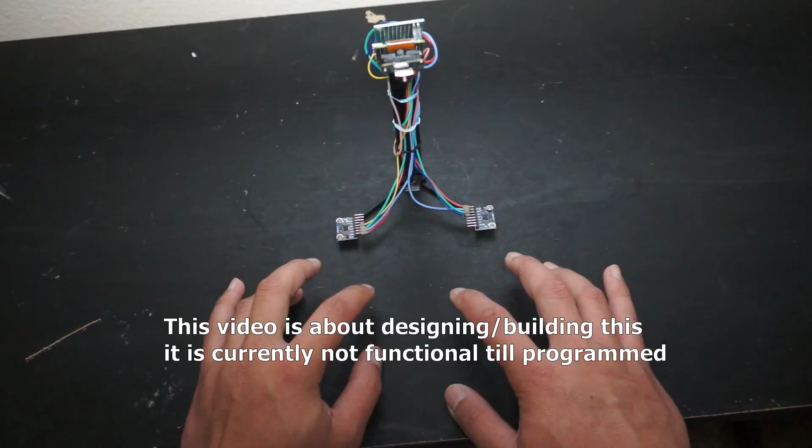So I'm starting a new project. It's a vision slash vibration keyboard. This is something I've always wanted, not in this form though. I want to just be able to put my hands on my legs and start typing like a split QWERTY keyboard.

But a solution for that is hard. There's several ways you can try it, like a glove with flexible resistor things that could maybe work. You could have strings that pull, potentiometers, or you could track every finger with an IMU. Anyway, it just means a lot of wires.

The ideal way is like there's nothing, or something's on your wrist, which Meta has something like that, but I myself don't know how I could get such fine control. This is just a learning project for me.

So I got a drawing here showing how it would work. This camera is more overhead than forward, but you would see your two hands, and then on each side is an accelerometer, which can detect the half that hit the keyboard and then how far away, which that's probably not going to work that well, just because these points are near each other and it'll just assume it's in that vague direction.

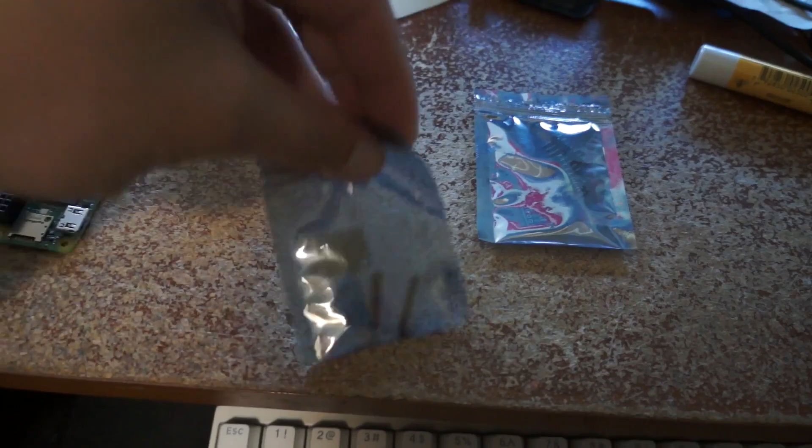These are the accelerometers, the basic 6050. This is an accelerometer and gyro. Pi Zero 2W, which Pi 0.

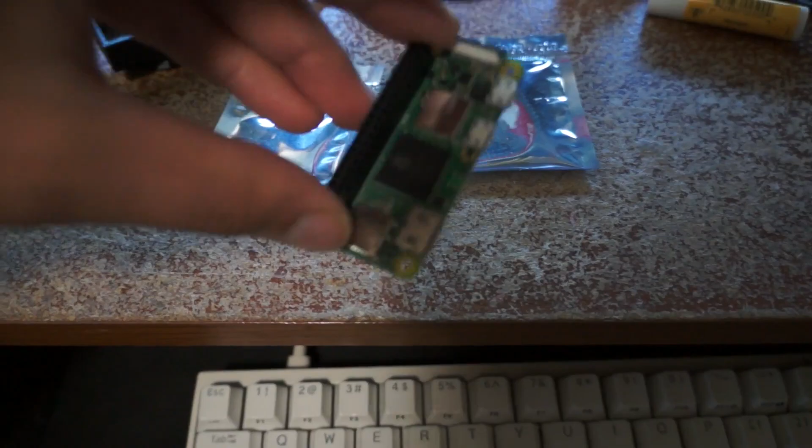This one may have a problem, so I'm flashing the image now. But I remember when I was trying to build this camera here, I couldn't SSH into this thing. The only other Pis I have are 01s and a 4.

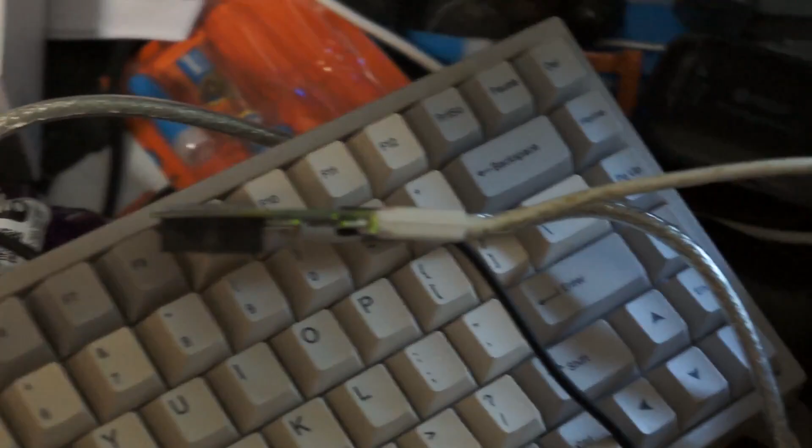So I've tried this 02 out, and there's something wrong with it. It's not working, it just won't work. I tried Bookworm and 11. I bought these online, they were like 15 each, but it's like the fourth one I've bought, so it's possible this one in particular is bad. I go into raspi-config and then try to connect to the network, and something's wrong.

Anyway, what I'll do is use SSH to control it by serial through USB. I think you can do that because this thing will require power from somewhere. I think you could make it battery powered, but there's really no point.

It's just gonna sit on my desk, so it'll just be plugged into a computer, and then you can also program it from there.

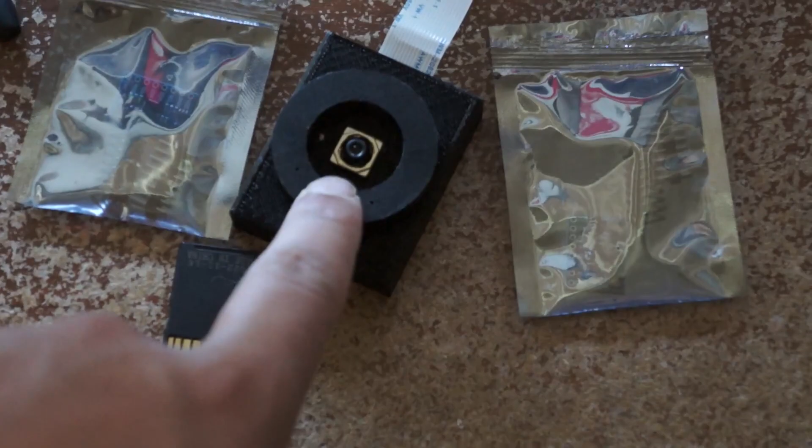But this is the V3 camera module. It's wide angle, so that means it doesn't have to be tall to see both my hands. I already mentioned those are the IMUs.

Progress is slow, and I might be a DoorDasher soon. Just nervous about it because I'm not a people person, and driving my car I'm gonna risk crashing it or whatever. Oh man. But yeah, so I'm distracted.

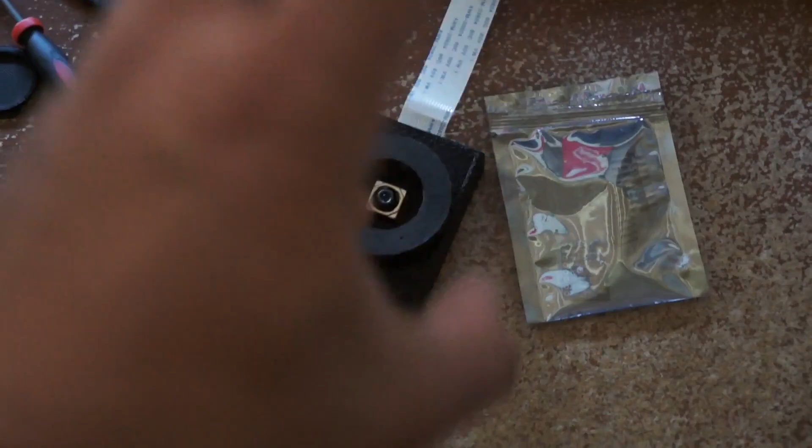I'm trying to get this thing prototyped today, although I only have 5 hours. I gotta design a stand that holds everything, wire it all up, and print it. I'm going for the easiest design where it's bare minimum plastic, so the print time is faster.

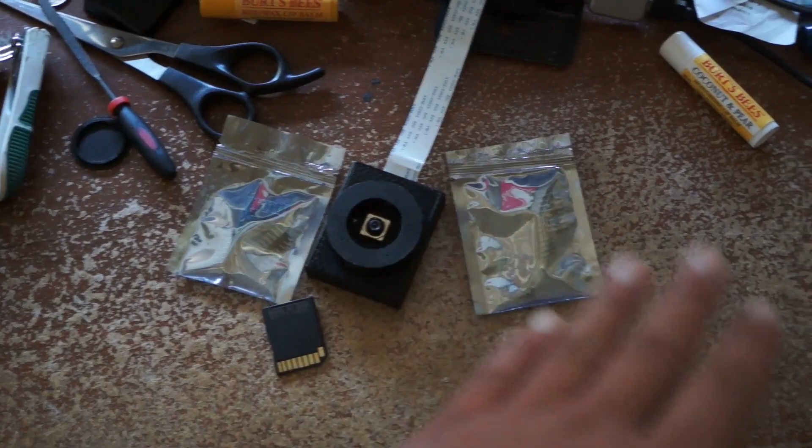I did just realize that this Pi won't be useful if it doesn't have network connection. So I'll steal a USB adapter from another Pi temporarily while I work on this thing, because once it has all its dependencies and whatnot, it doesn't need a network connection anymore. And you can just, well, it still has Bluetooth on it that should work.

Ideally, that's the part that would be keyboard and mouse. Actually, I was thinking about trying to make like a touchpad thing. This is all beyond my skill right now, so I gotta learn some things to make it work.

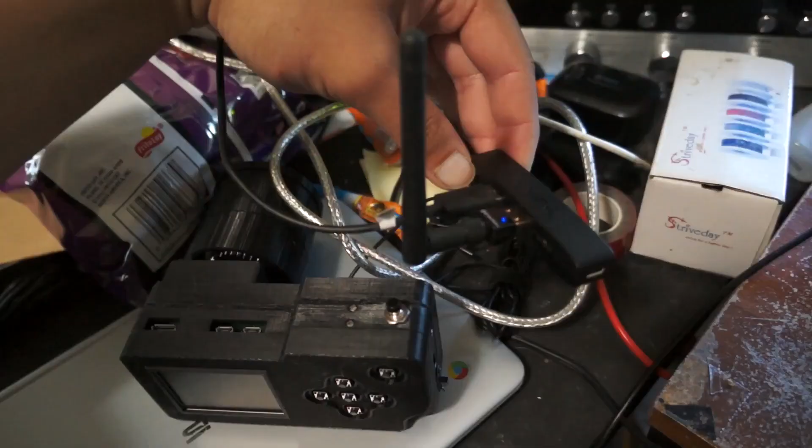But yeah, so here's the USB Wi-Fi adapter. This is an OTG cable going into the Pi Zero 2.

So now there's a WLAN interface, so I can upgrade it and work on it. It can pull down packages. Normally I work on Pis without a monitor, usually headless through SSH, but this one has a Wi-Fi problem, so you can't even ARP scan to find it because it doesn't have an address to SSH to. That's why it's plugged into a monitor.

I'll say too, this whole project is kind of stupid - here's a keyboard, why do you have to make one? It's like I'm filming with a camera, why did I make one? That's even worse. I don't know, it's just the process of figuring something out, imagining, making. That part is fun to me. I think about that with other things, like why make more operating systems, why make RISC-V - which is open source, cheaper, that kind of thing.

From my point of view as a higher level language developer, like Python or JavaScript, the thing running underneath doesn't matter to me. But yeah, I don't know, everybody has their reason, their drive, right? Like I don't think a fancy wooden lamp should cost $3 grand, but some people would buy it for that. That's a real excerpt from a friend of mine that deals with antiques - someone bought a wooden desk lamp thing for $3 grand. I was like, damn, money is funny.

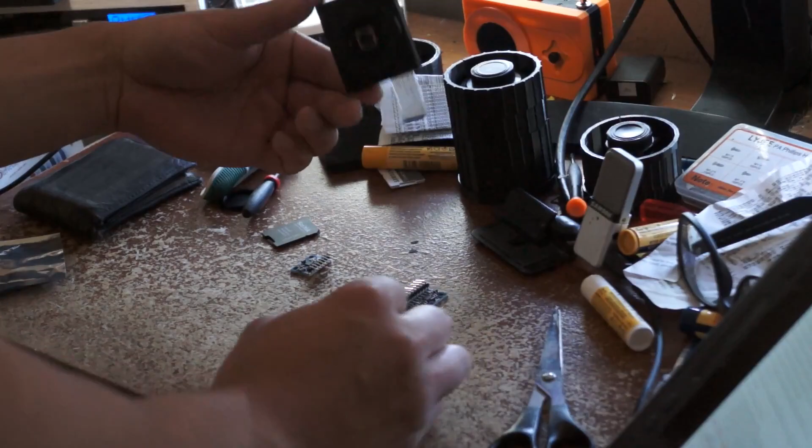Here's the camera, your hands are on here. See, my keyboard is down here. And then the thing that's hard is this table is brown, my skin is brown, so I don't really know how well this masking is going to work.

Masking, where you remove a certain color or range of colors from the scene. So the camera will be above, and what I want to do is just naturally rest my fingers, which is not the same as a straight keyboard - my hands are outwards like that. And then, on the monitor, you'd have a live video feed of your hands, and the bottom's like a green screen, and you have the keys of a custom keyboard.

That's the thing too, like if I'm writing code I need to be able to see the symbols. This 65% keyboard has bracket, square bracket, arrows, slash - those are the most common programming symbols you need, so I'll have to have those.

I think it's interesting though, these keyboards are designed straight - I know there's other ones that are split or curved or whatever, but yeah. I tried to make a keyboard before for a touchscreen and it was so annoying, arranging the individual keys. The easiest way for me to do it is through HTML and CSS, not through a native graphical library like GTK or whatever. But yeah, so that's the plan.

And then I feel like it makes sense, right? Because the camera can't easily tell that your finger touched the surface, but the vibration detection from the IMUs would do that. Isolating it by hand would also make things easier than just using one. I'm gonna try and do a better job of documenting the process, what I'm doing.

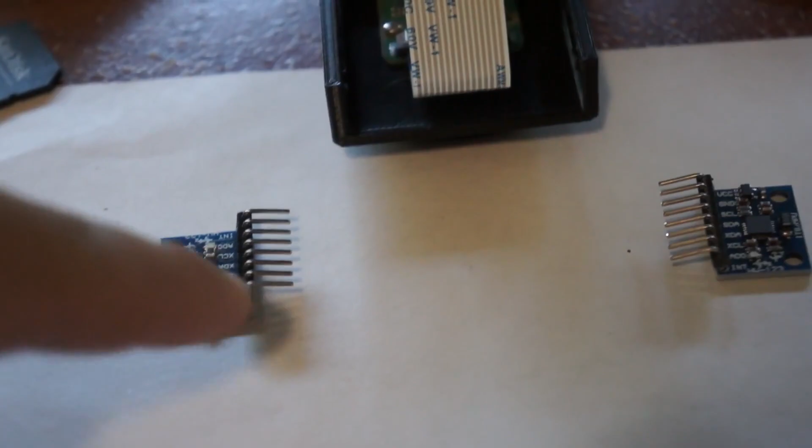So after that, I gotta solder these down. Just put some flux, solder, connect the camera to the Pi, which that can come later. But what I have to figure out is how high up off the ground it needs to be to see my hands.

And then I can design and model this. Well, I already have models of those parts, but knowing that distance and the X distance, that's how you start modeling a physical body.

The Pi Zero 2 here will have a board, not really a daughter board, but a PCB board with a male 40-pin header on it. That will be where it powers the IMUs from the 5-volt here, and it'll also take in all the SDA SCL lines for the I2C.

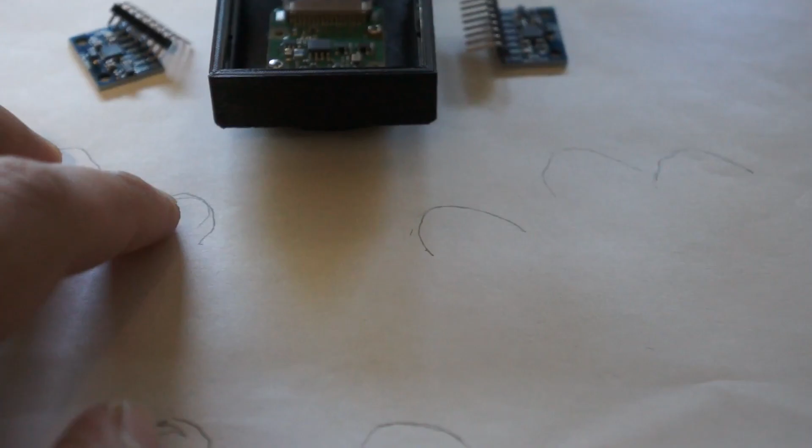After that, I gotta start programming some things, like getting these values, which I've already done before - not really hard, a lot of libraries for it. What's hard is the vision masking stuff, specifically doing it in real time, fast enough for keyboard use, and then merging the IMU data, which is where the ML training comes in. Right now I don't know how to do that. I have some idea, like I've watched people train models for handwriting, but yeah, I'm gonna get to making this.

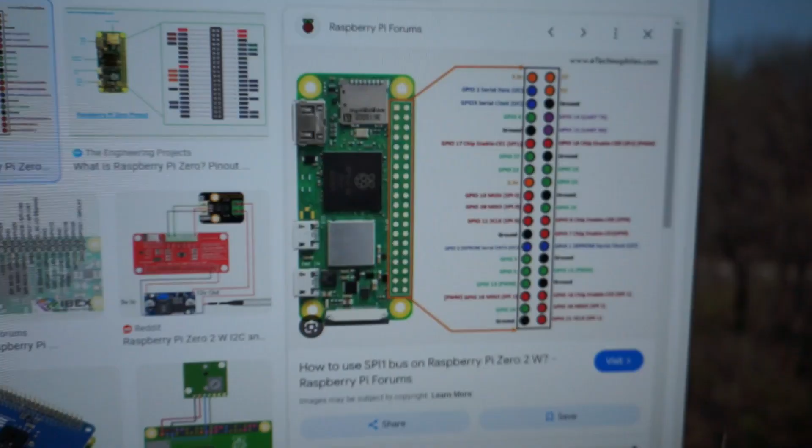Just a quick comment - this is the pinout for the Pi Zero 2. The other Pis are similar too, if not the same, but I'm not saying that. There's the I2C there, that's one, and there's another one here. Each one can have multiple devices attached to it - they'll just show up as different addresses when you scan them.

That's serial right there, UART. And the MISO, MOSI - that's SPI. So yeah.

I was actually thinking about it. I think ideally the design is like a stack. The Pi attaches to the camera, and then this thing is mounted to a swivel, which you can tighten with a screw once you've aligned it.

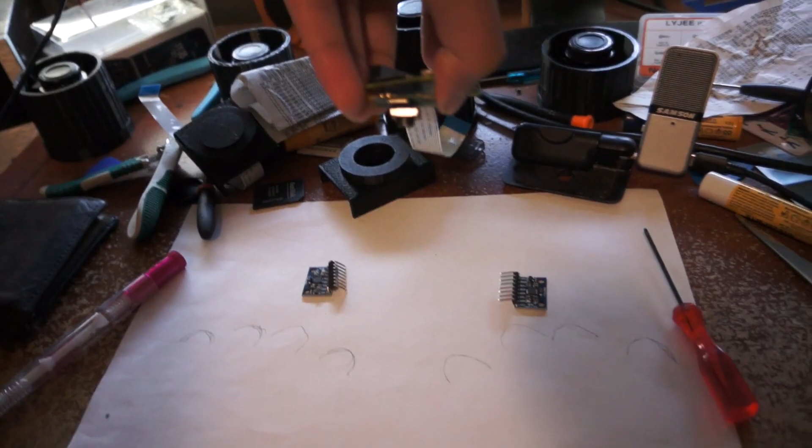And that just goes above - see my fingertips there? I'm not trying to have it directly over. I want it to be like at an angle.

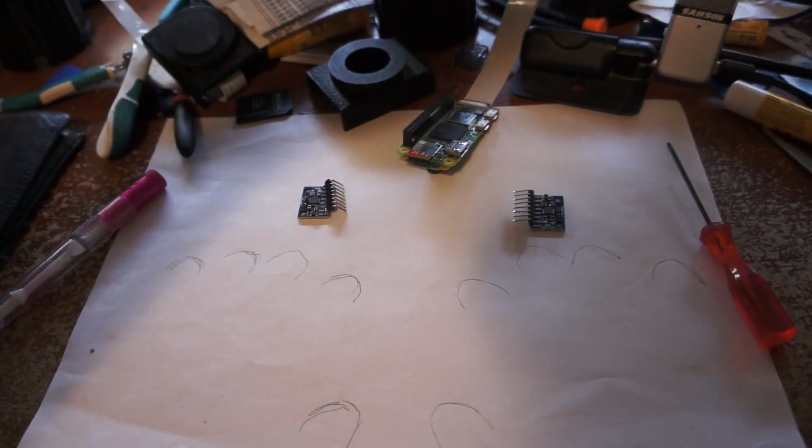And then the legs of the stand hold the IMUs, plural. And then the USB connected to this thing - well, it's really just power, because ideally this thing works as a Bluetooth device. I've had problems with that, so I don't know. But for it to be useful, it has to be low latency, like a lot of my keyboards are 2.4 gigahertz or Bluetooth, so that's what I'm going for. I mean, direct wire would be something, but I'd have to learn how to make it appear as a PS2 device or whatever for a keyboard.

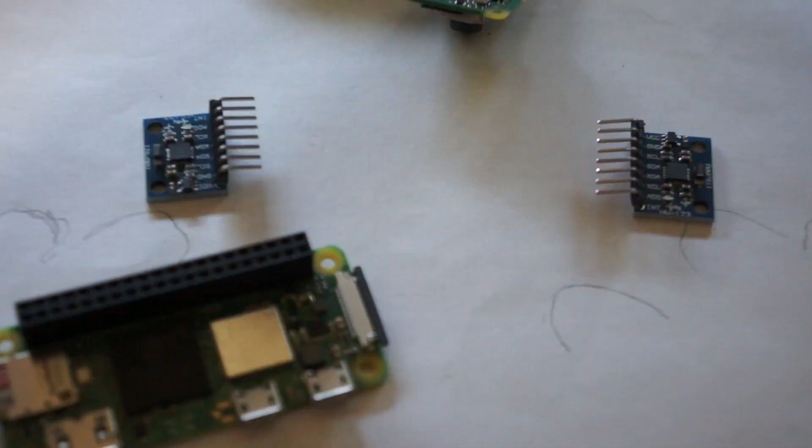So I don't know. I want to point out, you only need 4 wires for the IMU - the power, VCC, the ground, SCL and SDA, like clock and data. And you can see here, it just goes in there. In the library, you specify the address for each one, and then you got your loops running. Then you're like, a tap on this side picks up the Z value, acceleration pulse - so it'd be like, oh, left was tapped, right was tapped.

This is like the laziest design I can think of. There's one flat piece, it's like an A shape, with a couple holes for screws to go into it to mount the IMUs. They are almost flat except for where the male headers stick out underneath, so you have a groove, and then holes thick enough for screws to go into without affecting the flat base. So it'll probably be like a riser platform, with screw surrounding material around the hole for the threads.

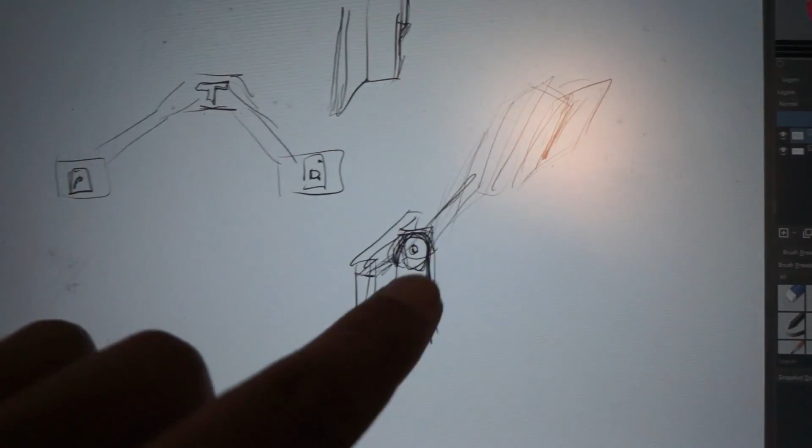And then there's a T-shape insert thing. You pressure insert this, it's not like adhesive or anything. It's like a long extruded T-rod, and it has this round head where a female thing goes around it - screw. I think that would work.

If not, you pinch it. But anyway, this is like a pivot point. A screw would be ideal, you just tighten it. It probably will have outer clamps that get pinched together to grip it. That's like a standard hinge design. And this has the Pi on it and the camera, so that's the thing you swivel to aim down at your hands.

So that should be really simple to make. Installing Pi Camera 2 right now. I'm just running the MJPEG server with Pi Camera 2, so that will allow me to live stream what this wide angle camera is seeing, and then I'll raise it up until it has a good view of the hands.

That'll be a good base height to work with for the physical design of the body. Then I will finally get to soldering. Solder that, make the board, attach it, and it'll be design and printing. Probably won't finish it before I have to leave, but I'll finish it today. Then I'll put this project aside for a bit and deal with door dashing.

Well, I was trying to measure this distance, but this cat is in the way. Look at him, he just woke up. Look at that.

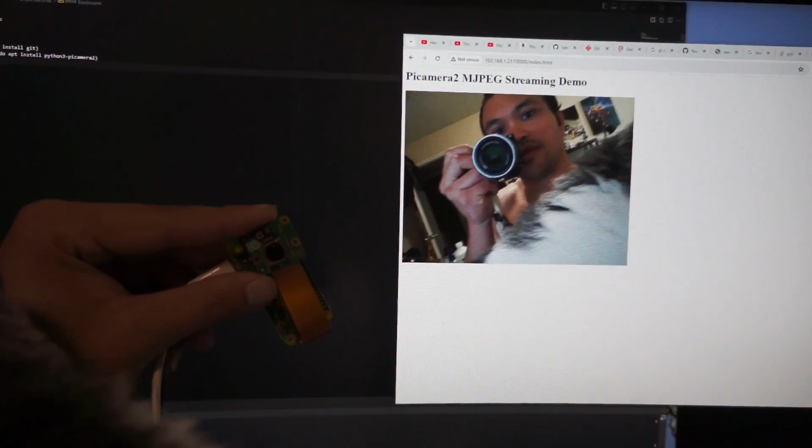The live stream is extremely slow. I think it's because of the USB Wi-Fi.

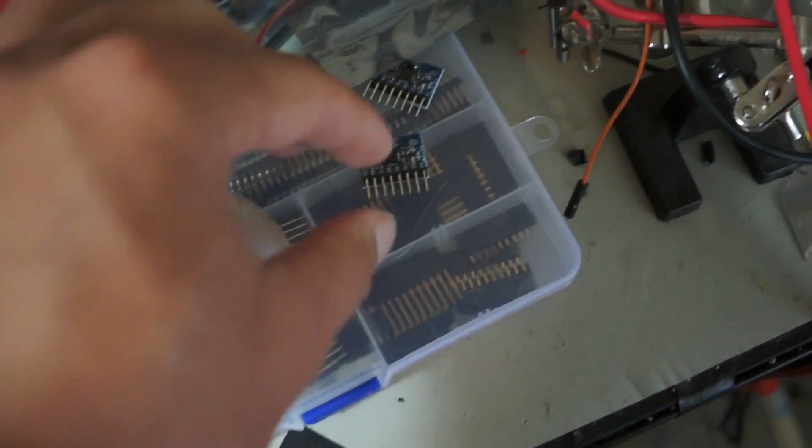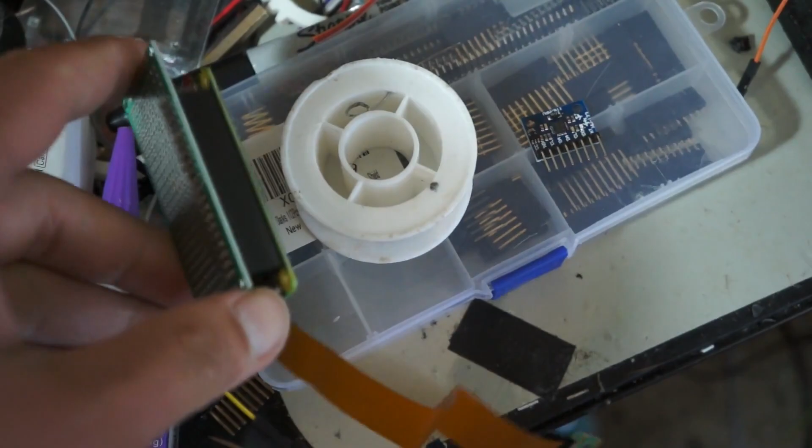So I got the board soldered on there. I also soldered these on. I'm trying to find a wire right now, I need a piece like this long. I've got 6 out of 8. Trying to find black or brown, something for ground. Then I'll wire the IMUs up to this and test that they work. After that I'll be able to start designing the stand and print that.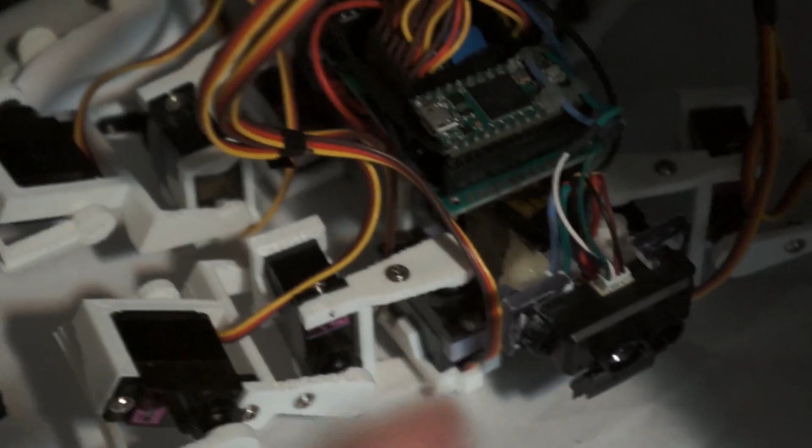I want to point out that I've made a lot of mistakes in this hobby. There's like a bunch of burnt Pi Zeros. There's my freaking robot that I hide from my cat so he doesn't eat it. Feels so bad that it's hidden in there. That's fine, it works and everything, I just hide it so he doesn't chew on it.

So it's like the worst solder job. Not really terrible, it works, but anytime you've got to join 2 wires to the same point, that's problematic. It's better to just extend it and separately solder them. But I did it anyway.

Oh god, I had to sneeze. Alright, so God, yeah, I'm struggling today, man. I'm like, I don't want to do this. But yeah, I have individual shrink tube, but I'm just gonna use hot glue. Feeling lazy.

So you can see here, I'm looking at a pinout over here. So 2 5-volts, a ground, and the data and clock lines. Go over here, see the cable for the camera? It's the same over there, the cable for the camera. Orientation's right.

So then, yeah. Positive 5. That's ground. Across is 3 volts, nothing connected to it. 3.3, that's your data line. And then clock is green. These are just ground. So yeah, I'm gonna put some hot glue on those. Well, those are fine, those are clean connections. And then I'll write some code and test each one to make sure they both show up.

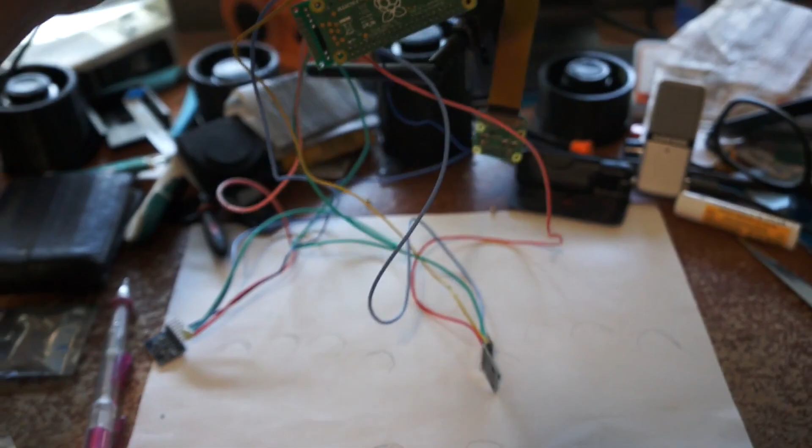I wanted to be sure the wires were long enough, but this is a bit excessive. Because the Pi will be up there somewhere, and the IMUs are only going to be that far away. Oh well, alright, let's see if I can solder.

I'm looking at this Adafruit tutorial and... why? I don't want to do that. I want to look at the command. What's the command? There's just a freaking single CLI call. Where is it?

Oh yeah, alright, so let's do raspi-config. Go up here, looking at interface. We want I2C, yes. Okay, finish. And then where is it? Is that it? ls /dev.

There's this thing where you scan the bus. That's it. Sudo. I2C. I2C detect.

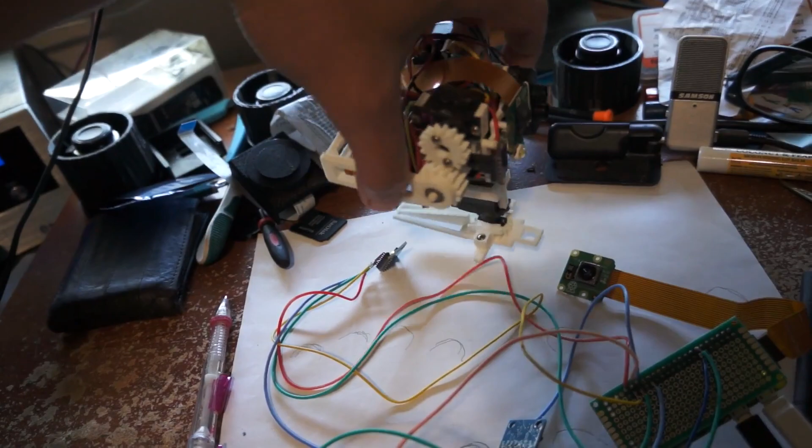This is interesting, it says it only has two buses but you can have three. I don't know what's up with that, but there's one that has 68, there's two 68, so they're both showing up. I just gotta figure out which one is which.

And then I'm doing left and right for the orientation from the human POV. I don't know if that's dumb or confusing, but it makes sense to me. I should be able to tap, tap, tap, like left. Actually, right will probably pick it up too, but I'll just do a comparison of which one is stronger.

So left, up, down, down, down. Like you can see it. Holding it still, right, 1. Turn perpendicular, 0. Yeah, because the force is orthogonal, or no longer parallel, it's orthogonal.

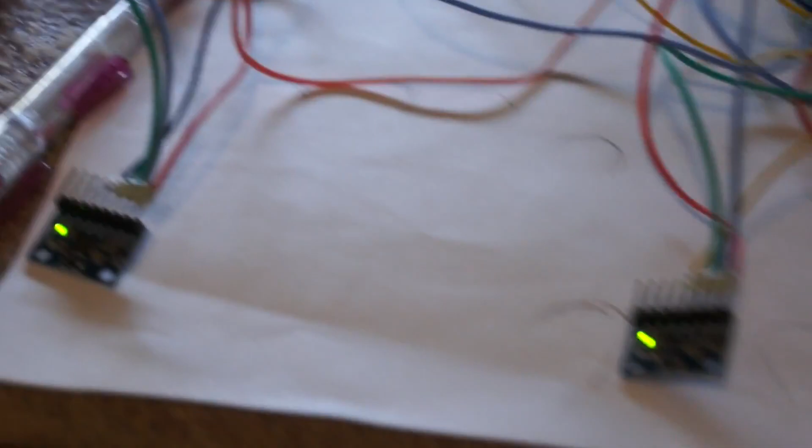Anyway, so that's working. God, these wires, they trigger me, man. They're so long and they're just tangled. Ah! But I'm lazy, so got that.

Now I just gotta design the body, assemble it, blah blah blah. The camera does work, but the USB adapter Wi-Fi stream is too slow.

I'm also concerned this thing takes really big pictures, like 4,000 by 3,000, almost 4 by 4, but and they're super wide. When you're doing the real-time masking, it's not gonna be that big. So the issue is how far away should it be from my fingers? But that's not really a problem because you can just print longer or shorter T-beams and raise it up and down. So that's not hard to change, at least.

So I'm slowly working on the design. These are all the main parts modeled. Main concerns are the dimensions, like length, width, height, volumetrically, and then the holes for those screws for mounting it. But I decided that the base where the IMUs are would be 2.5 inches apart. That's just based on this.

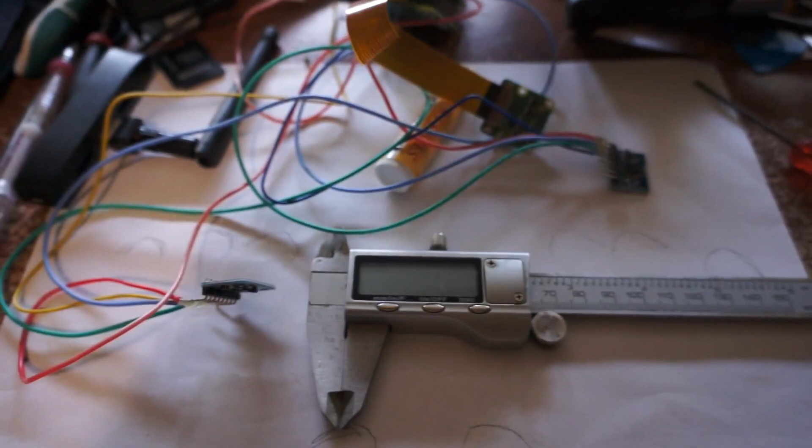It's actually pretty big, but yeah.

So you see these two points here, your hand is here, middle of the IMUs, middle of your hand kind of. And then the angle, I don't know, I didn't want it to be 45 degrees so it's a little less than that. It's really not scientific at all, I'm just making this. But it'll be like a physical platform, and then most of it is code.

Man, this is like the laziest thing I've ever designed. I'm just fighting like, I don't know, sadness.

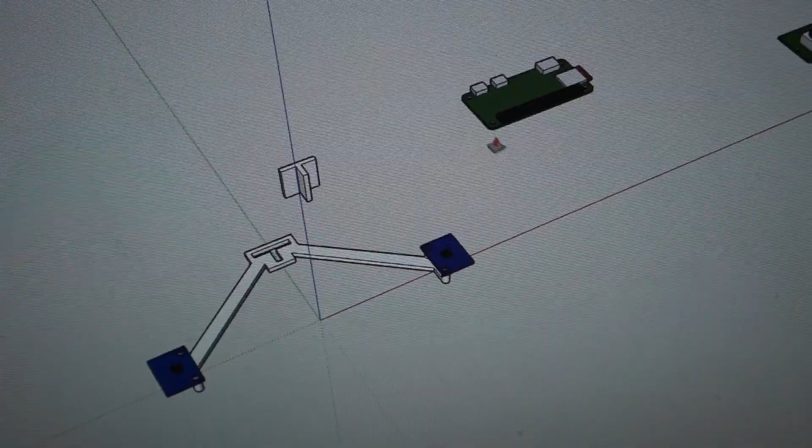I'm concerned that this thing is not gonna work, because it's relying on vibration, right? But the IMUs are away from the floor. Granted it's a solid piece, so the vibrations will travel up to the IMU anyway.

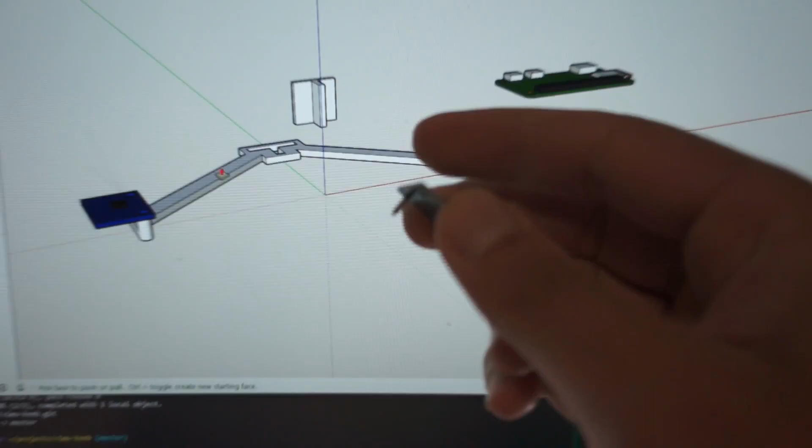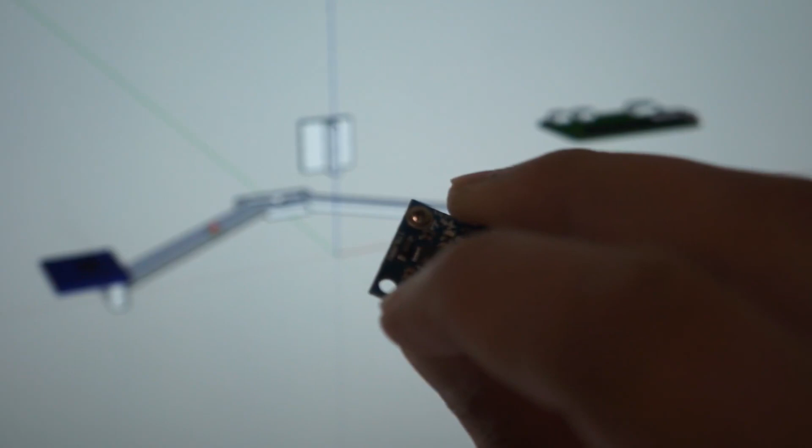But I'm using these, where is it? Where'd it go? Oh yeah, right here. Well, you can see it on the actual IMU. These are like cheap servo screws, very long, but the main thing is the head is wide. See there? It's larger than the hole on the board, so that's what pushes it down, or grabs it.

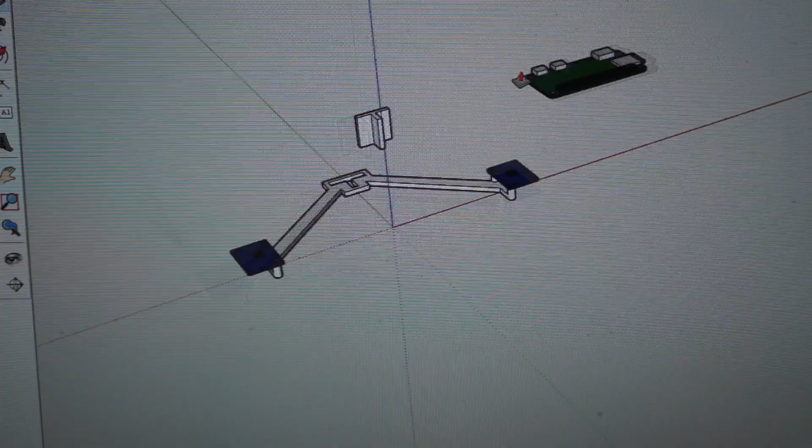Yeah, that's an easy thing to print. Attach those, then you have an extruded T-beam thing with a hole at the top. I've gotta design a mount for the Pi that also holds the camera, which gets attached on there.

The USB stuff attached to the Pi will suck, that'll weigh it down. So the hinge might have to be really tough to hold that weight. But eventually, other than the USB thing, it should operate off Bluetooth, which is another thing I gotta deal with.

I've got like another hour, 15 minutes before I have to leave.

I could print this real quick. Look at that light.

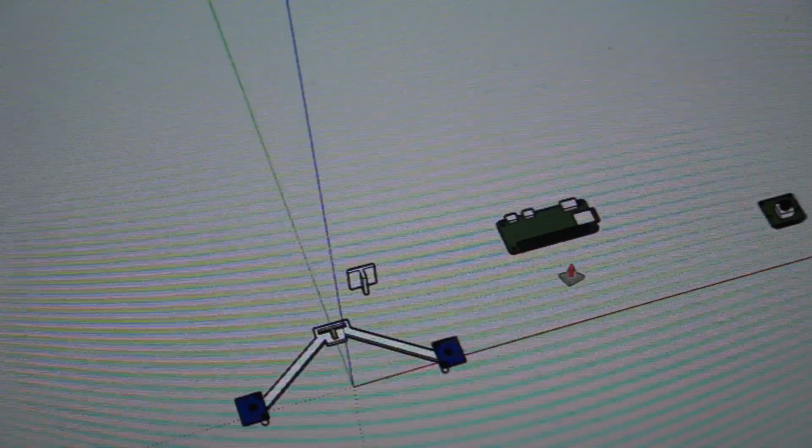The thing I want to say is, a fast way to prototype this without figuring out Bluetooth is to use WebSockets. You can make a web interface that receives the data via WebSocket and then display the letter typed. I mean, before all that you can just do it in terminal, but I was talking about seeing it on screen.

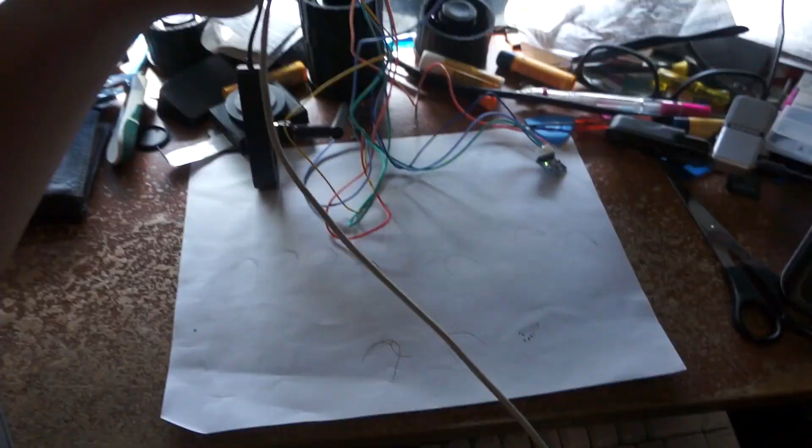This is a quick sample photo. And man, it has to be high up, like that high, to get a good shot of the hands. And this is a wide angle lens too, so yeah.

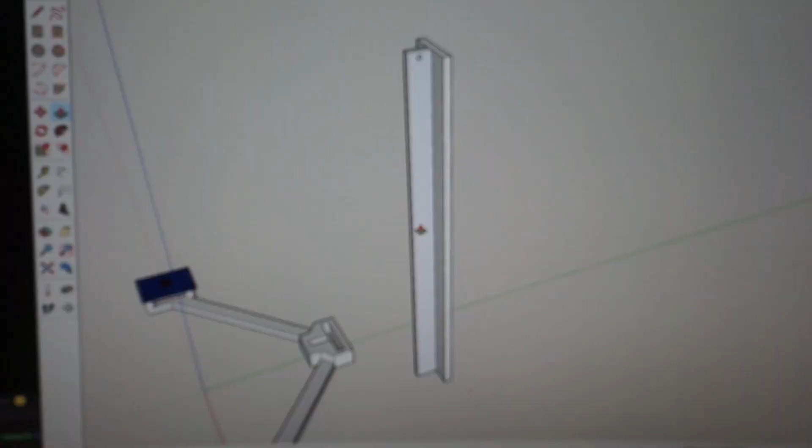Damn, that's taller than I thought. So I'll get a measurement of that, and that's how tall the base plus the angled mount has to be, at least. So just thinking about this, initially I was going to make this angle changeable. I also thickened this because I already know that's too thin. But...

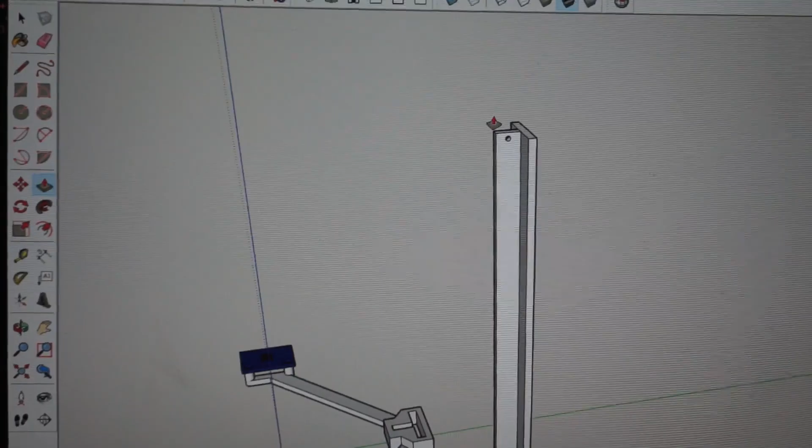If it really is like machine learning and everything, it's going to be trained at a specific angle. So this should not be something you can just change. I mean, people's hands will be different, so I don't know. I mean, if you train it yourself, you could change the angle.

I don't know, I'm gonna see. It's not hard to make it dynamic, I'm just wondering does it make sense? Because you could design the angle of the swivel thing to be fixed. So imagine a piece coming in like that, and it has this cut, so it matches this perfectly, and it also rests on this ledge.

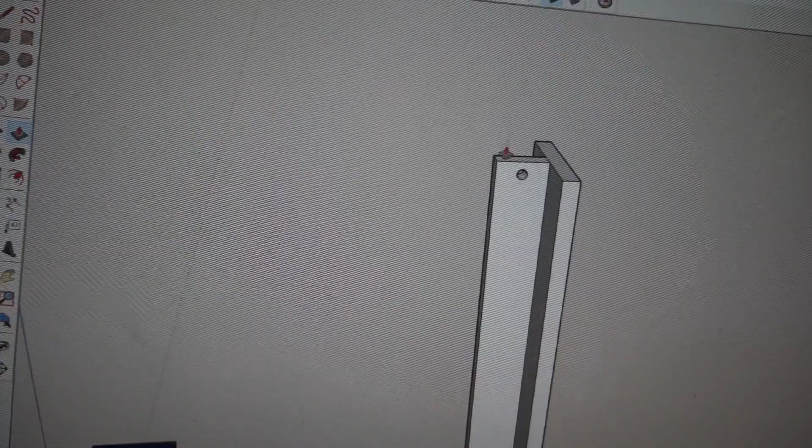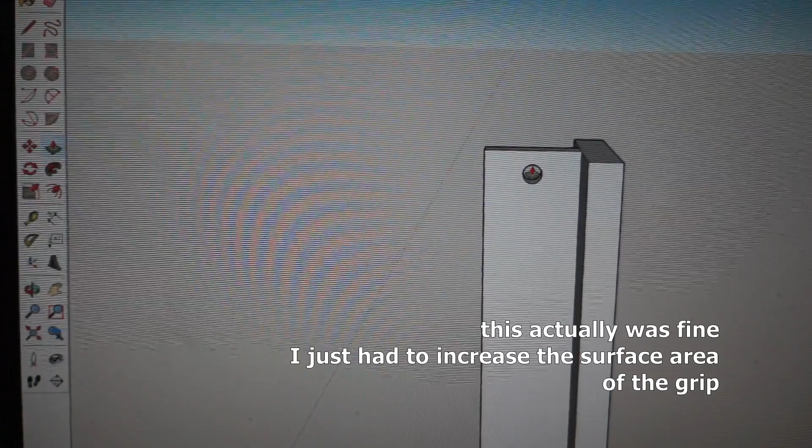What I'm concerned about with making it swiveling too is that the weight of the Pi and the camera is going to be a lot, and your squeezing part will have to hold all that load, which I've designed before, but yeah, I'm just lazy right now. I don't want to deal with it.

So I'll pick an angle, because honestly the physical part is minor compared to the code. The code is going to be where everything is, that's going to be hard.

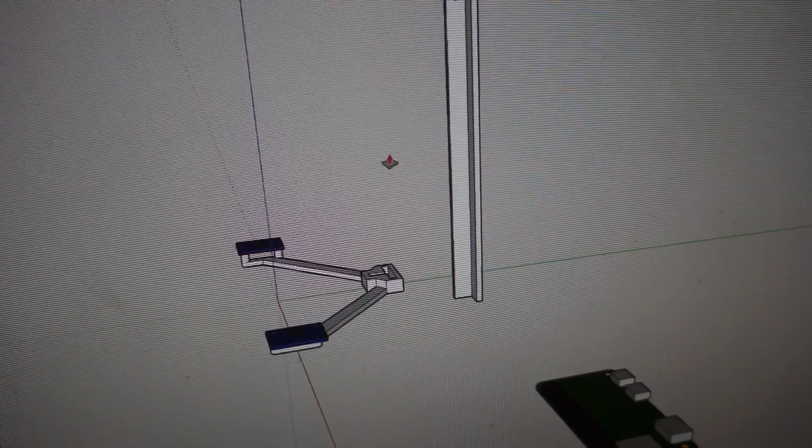There it is. There's the first test fit.

Modified the design with a raised ridge here so it's even stronger. This part has to be thicker too. The screw part is fine. I'll probably thread it first, like run it through without the IMU before mounting.

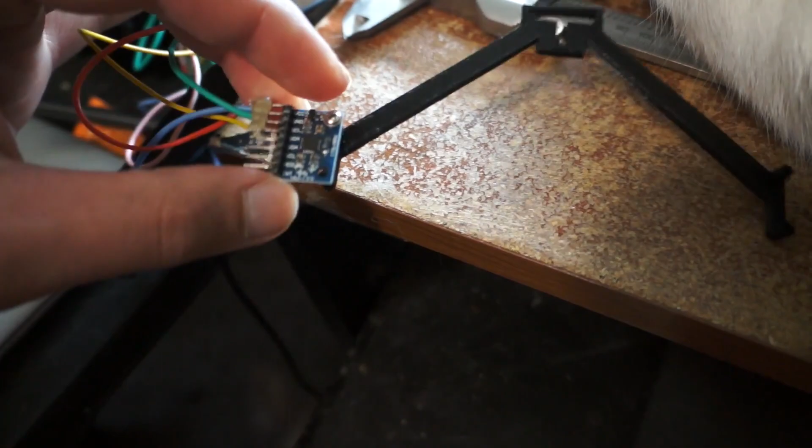Yeah, it sits like that.

I should have had the wires on the inside rather than outside, makes the profile smaller. I still can, it just moves the IMU closer inwards. I will though, it's cleaner to do it that way.

I forgot I had some more of this pad stuff, like for your mouse or keyboard rather. So, and that's black, so that's easy to subtract from your hand, it's just 0, 0, 0.

So yeah, the only thing is it's a little long, I'm gonna have to cut it this way. It hurts, but yeah, the thing is this softer material might be nicer to type on.

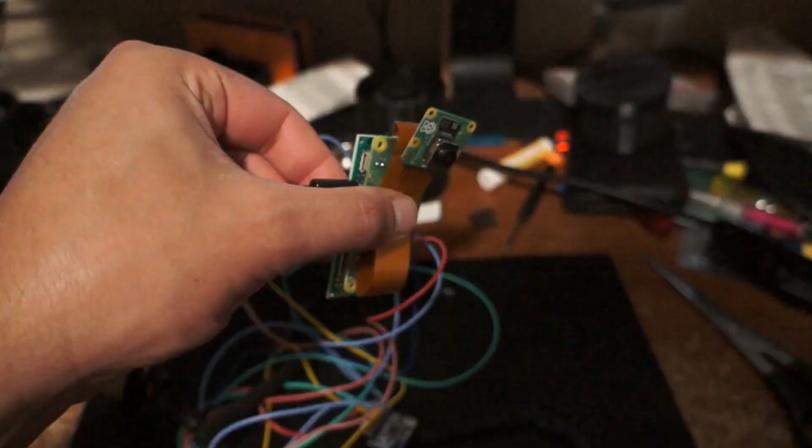Trying to come up with a lazy design for this. Yeah, probably screws coming from the back, pulls it. No, that won't work. Well, I'll detach this piece.

Detach that piece, screw from the back forward into the plastic. Let's see. This camera has to be mounted to something too. Like that. Trying to figure it out.

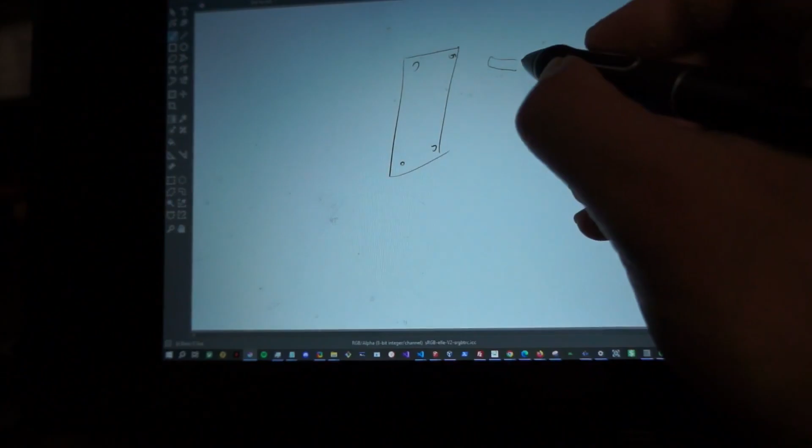So it's a rectangle like that. Holes - let's say we've got these screw cylinders for it to go into. Assume they're connected, 4 of them.

Then, well, if that's solid, we can have the screw clevis thing, or whatever you call these things, that connects to the T shape with the hole. You put the screw in like that. But...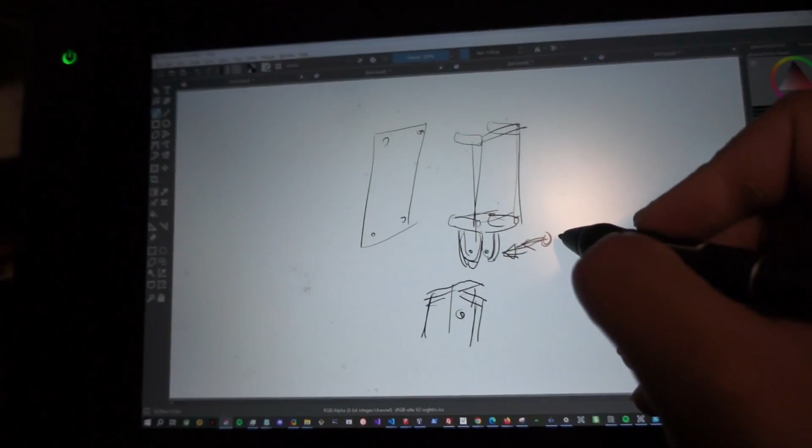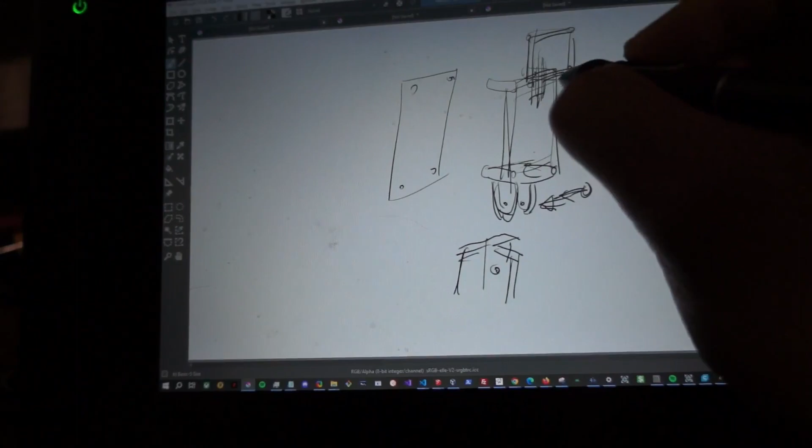That's just for this. Somehow the camera has to get attached too, which I could just have like a stick thing, and then the camera has a square deal too, similar to the clip cam. The clip cam has a lazy square mount too, see it? So like that.

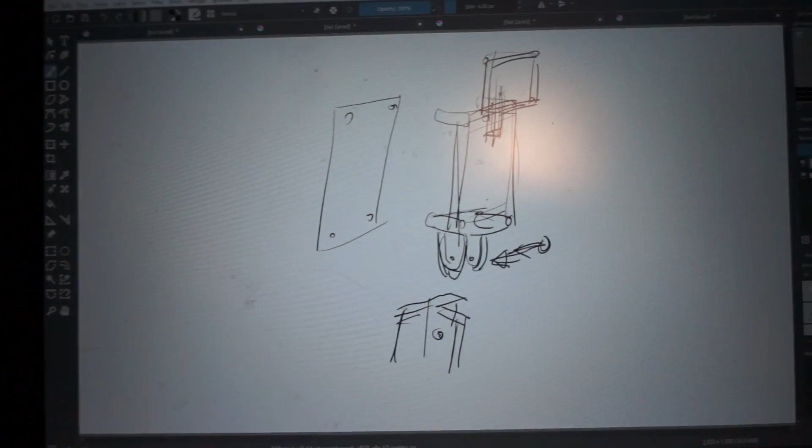I sold the computer that can program that thing. So sad.

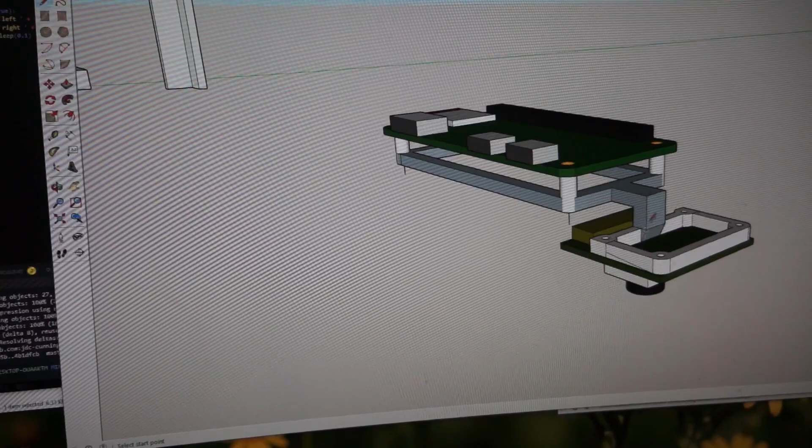So yeah, I'll go for something like that. The other print's gonna end soon - I'm trying to print these while I watch a movie. Alright, so here's the design. It's kind of nasty, but there's just like screw hole pegs, solid piece connecting all 4 things, and it extends. Why do I keep doing it?

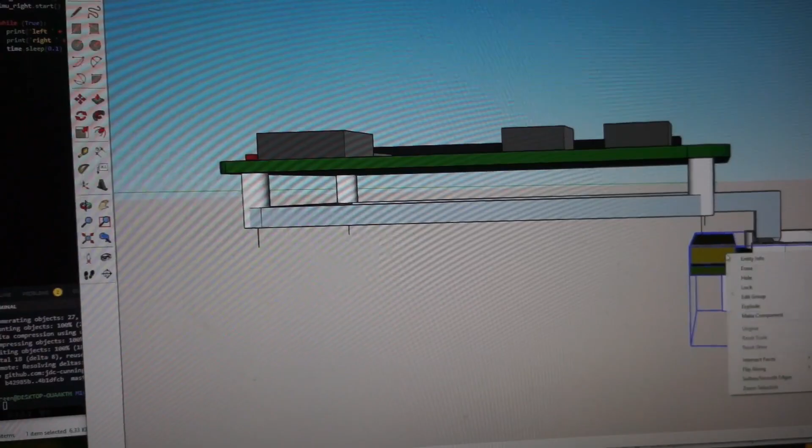It extends this like bar thing. I needed some gap here because of the ribbon cable. And then I took this from the ML clip cam, just this mounting thing, extended it there, so that's attached. Now that's like that, and then I designed a little squeeze hole thing - you put the screw in and tighten it.

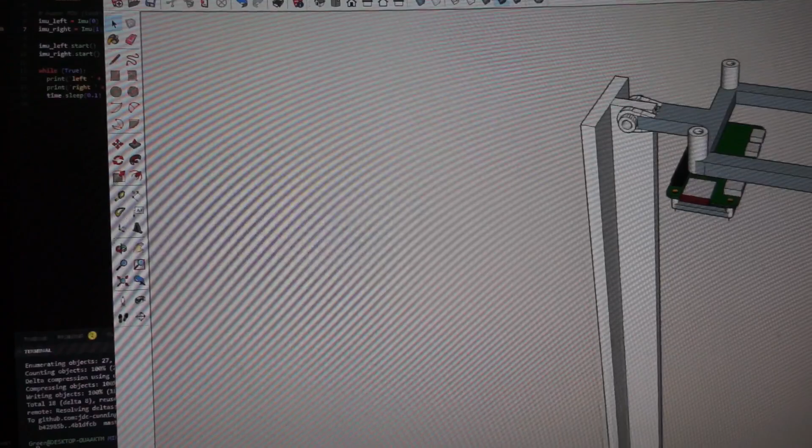Comes in, I think... I don't even know where. I think it comes in from this side, which is looser than that side, because it actually bites into this part to squeeze it together. That just looks sus to me - like it'll just immediately rotate downwards from there. And this hole here is actually too big, turns out - I forgot my tolerances, so I updated that in the standalone design over there.

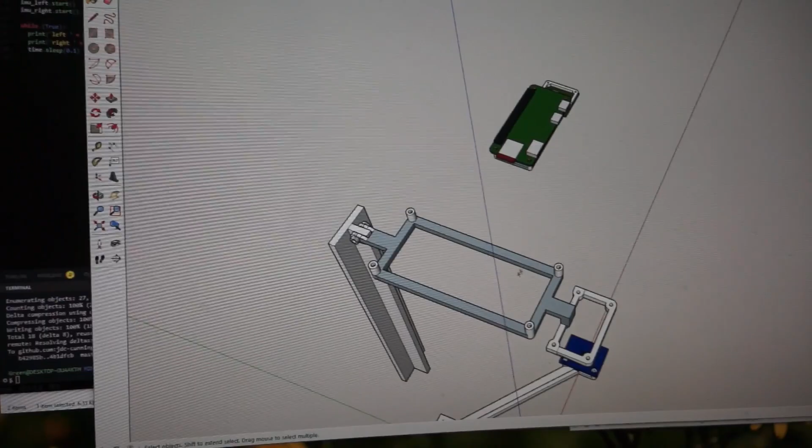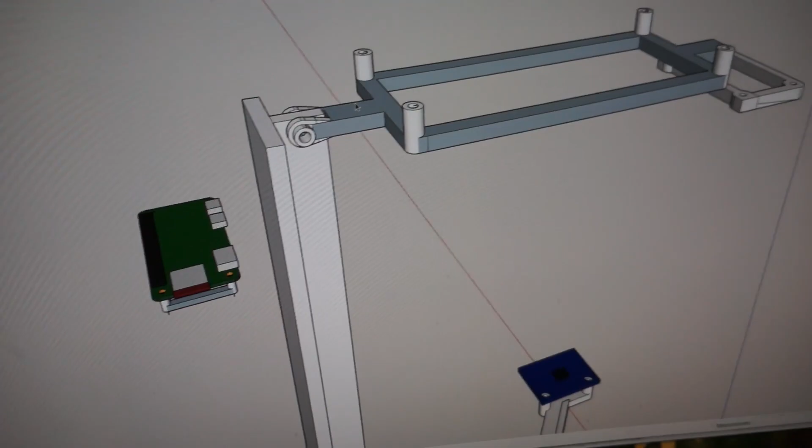Yeah, so I'll print this real quick. Unfortunately it's gonna have to flip and rotate so that this part is supported, but not that. That's a little less material, but arguably the same. The reason this thing is so long here is because the actual board extends this piece here, and I could have cut that off, but I didn't. See, it just goes on there.

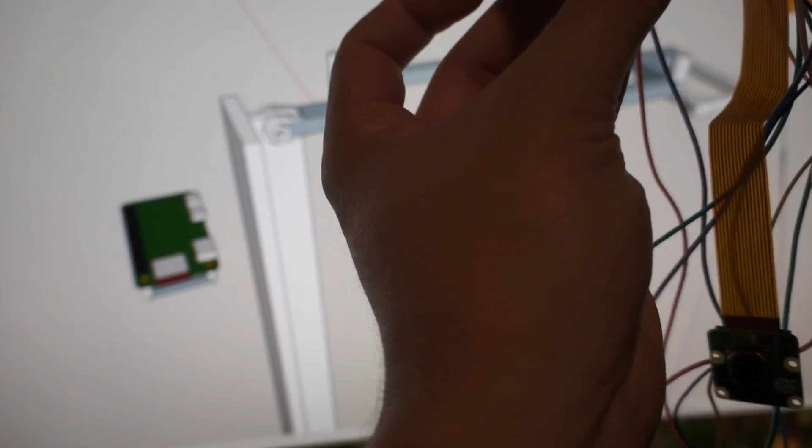And then yeah, up and down. That single screw is not gonna hold it up, I imagine, but I'm gonna find out. I just realized something - as you're typing, I imagine the camera's gonna shake, the image that you're training. Yeah, that's bad, I wonder how that's gonna be. Ah, there it is - it's flimsy, but it works.

Hey, what is this? Da da da, yeah it's so ugly. I wish I had all black wires or something. The black frame looks good though. I'm gonna take it somewhere where it can be viewed with less clutter.

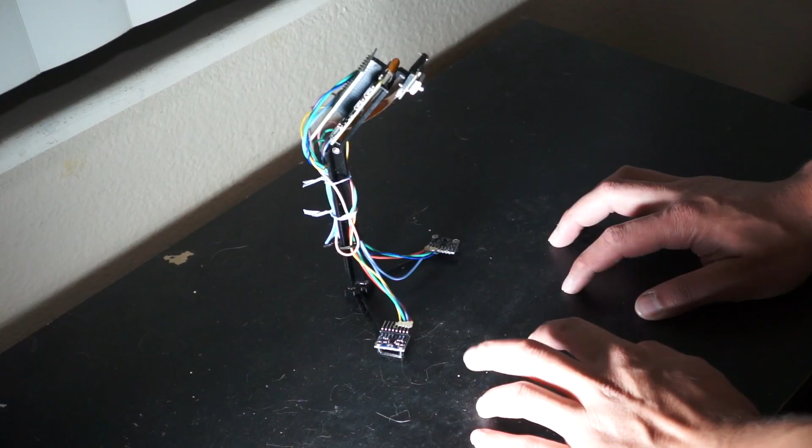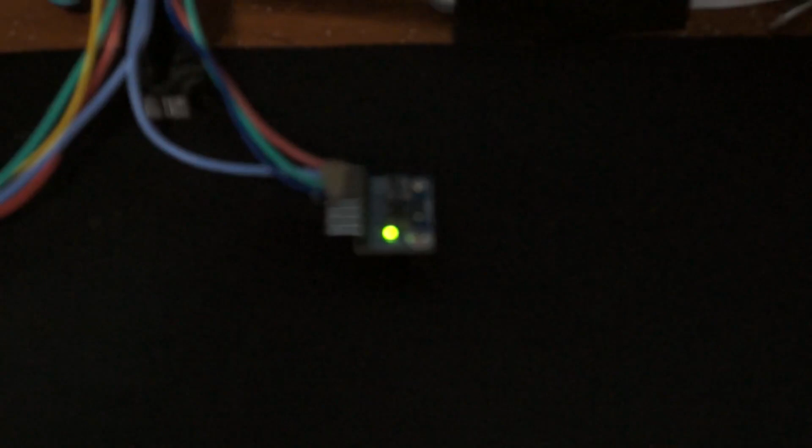So it's here, powered on. See the LEDs are on per IMU. Unfortunately since the onboard Wi-Fi doesn't work and I'm using this USB thing, it's top heavy, but after it's programmed and ready to go, you don't have to have that on there. And then what does suck is the USB power - could be like a local battery near the base, but I mean that would make sense, and you just charge it, but it's like a power hungry thing because it's a computer.

So yeah, at this point it's just programming. Let me get a shot of what it sees. So it sees that, which, you know, I'm not sure how well this is gonna work because the pinkies are barely visible. But yeah, that's where the IMU comes in to detect hits. Of course that's only like 2 extra data sets, you know.

I was thinking about having like 4 - that'd be crazy. And my knuckles look gross. Ew. Yeah, so I don't know.